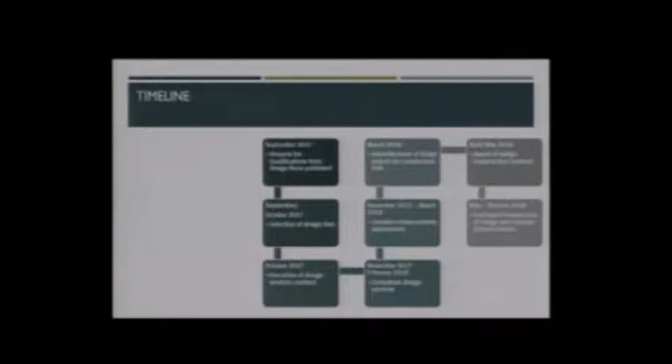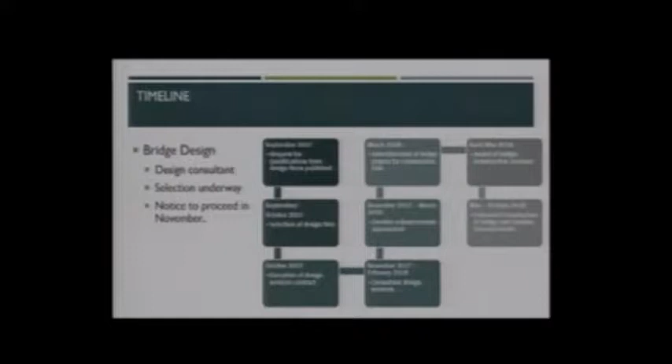First off, we'll talk about the bridge design itself. We are in the process right now of obtaining a design consultant. We put out a document called a request for qualifications back in early September. That's publicized, and qualified engineering firms who feel they can provide design services submit their statement of qualifications to the city. The city then chooses a consultant from that group, contracts with that firm, and gives them a notice to proceed to start the design of the bridge. We're anticipating that notice to proceed would be issued sometime in early November.

You can see here on the right, there's the request for qualifications, selection of the firm in October, the design contract in the latter part of October, and then getting folks started in early November. That would ultimately lead to a bridge design that we'd put out for bids around March of next year for construction of the bridge itself. We'd anticipate that construction would run from about April, when we'd award the contract, through essentially May through sometime late in the year, October or November of 2018, for completion of the bridge component.

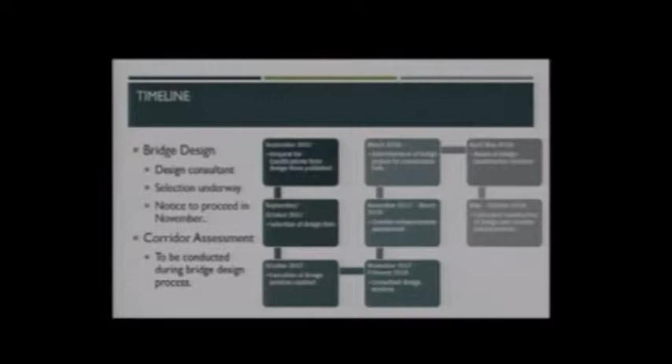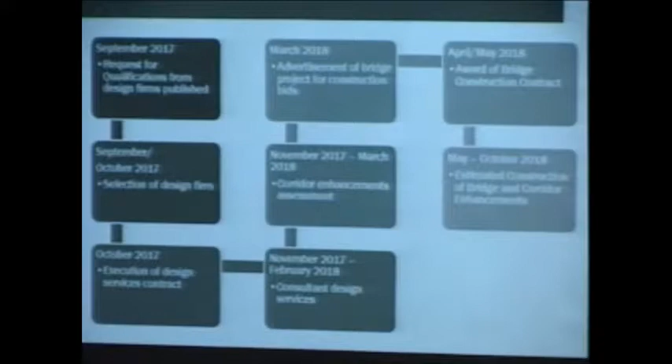Now, the parallel process going along with this is the corridor assessment. The idea is to take a look at the entire corridor from Washington Street all the way to Mountain View, and look at how we treat it - what is there, what may change, what perhaps should change with changes in traffic patterns as the bridge is installed. That's a process we'd be doing at the same time the bridge itself is being designed. You'll see in the schedule a corridor enhancements assessment happening November through March, through the winter, and then potential construction of those corridor improvements in that same time frame of May through October of 2018.

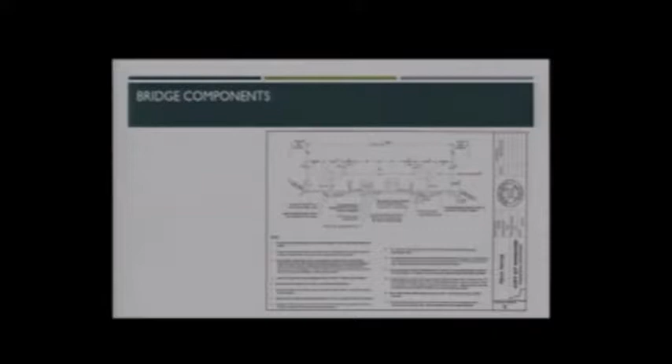So the bridge itself, in terms of what it will look like, is somewhat driven by the city's adopted standards. This drawing on the right is an adopted city standard for minor arterials, laying out what that street section should look like. This is where the numbers in the chart for minor arterials came from - the number of lanes, the bike lanes, and the size of the sidewalks. That's within this adopted city standard, which was adopted by the City Council back in 2014 by resolution.

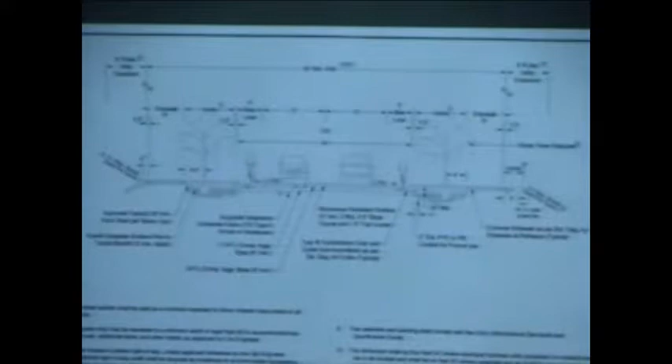In terms of how we'd apply it to the corridor, this is what we anticipate for the bridge section itself: still 2 vehicle lanes, which is what's out there today, 2 bike lanes passing through the area on the bridge, sidewalks on both sides, and most likely we'd match the existing street width. The standard here is 36 feet, but the existing road on either side of the creek is 44 feet. So instead of necking the curb down and back out, we'd probably just hold that 44 right through the bridge, matching the existing road section. That gives enough room for bike lanes, vehicle lanes, and a sufficiently sized sidewalk. That's what we're anticipating the bridge configuration to be, and we'll carry that concept into design.

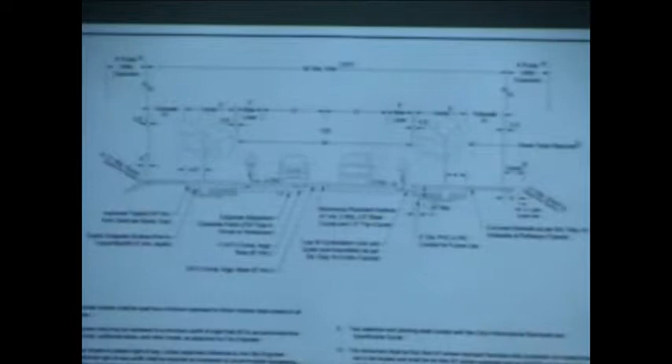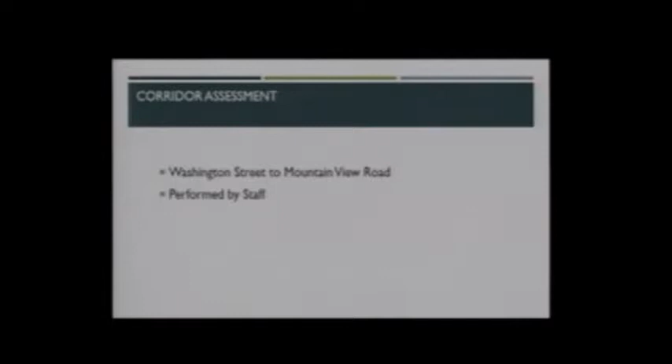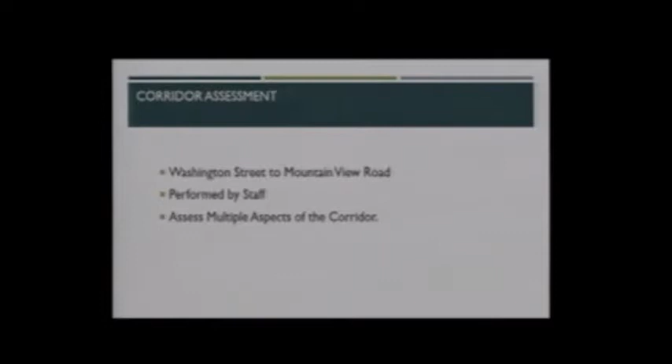Now, in terms of the corridor assessment, there are a lot more moving parts here, so we'll take a few minutes to talk about what those are. The idea, again, is to run all the way from Washington to Mountain View, looking at the entire corridor, not just the area around the bridge. It's something staff will be doing in-house, working with help from the Transportation Commission. We'll be looking at a variety of different aspects within the corridor and assessing what changes in traffic patterns might mean for those aspects.

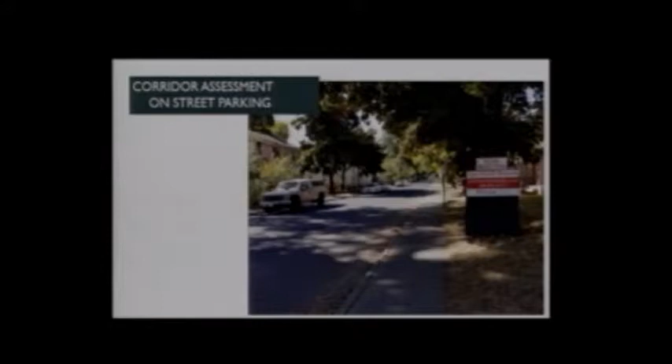On-street parking - obviously there's parking on one or both sides of the street pretty much throughout the corridor. It varies depending on where you are, changes sides of the street when it's only on one side, and in a lot of places it's on both sides. We don't necessarily anticipate any changes in the parking at this stage, but that's why we do an assessment - to see if there's any reason to make changes.

Bicycle facilities are a big one. These pictures represent some recent activities that we've installed—the beginning of some of the bike facilities along the corridor.

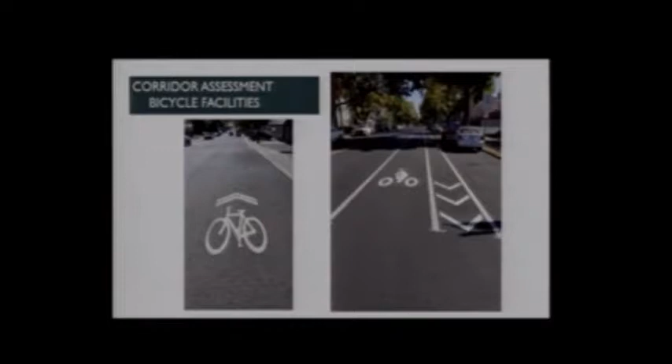This is actually the buffered bike lane, with a door zone buffer on the right side between the bike lane and the cars heading up the hill by the high school. That was installed here in the last month, part of the overall 2016 bike facilities and bike routes plan adopted by City Council, to start installing these kinds of facilities. So we'll be looking overall at the corridor and what other kinds of facilities might be installed beyond what we've already put in so far.

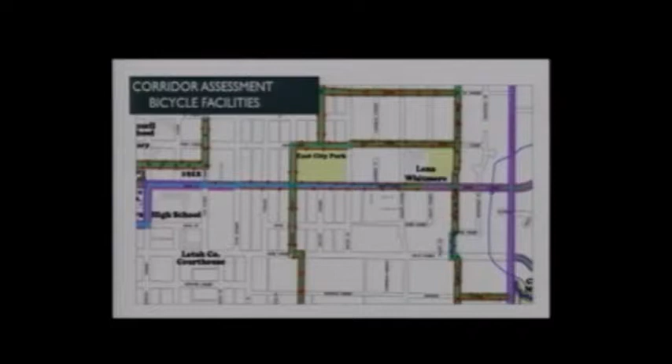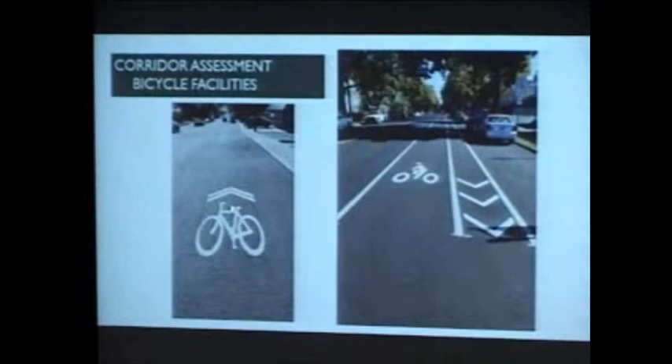This map is an excerpt from that 2016 plan, bike routes and facilities plan adopted by the council. Here's the high school, and this is 3rd Street in blue. The railroad-track pinky hatch represents bike lanes, and the lines with little red dots represent shared travel lanes, or shared vehicular lanes. So we would put down what we call sharrows—these guys right here—so that drivers know bikers are going to be sharing the lane with them.

So what we're looking at is: once you hit the top of the hill, Polk Street on through past, essentially almost to Blaine, we'd be doing shared roadway through there. The reason for that is it's only a 30-foot wide road, so there's not really room to put in dedicated bike lanes as we normally see them. Once the road widens out to 44 feet east of there, all the way to Mountain View and someday beyond, we envision bike lanes through that corridor.

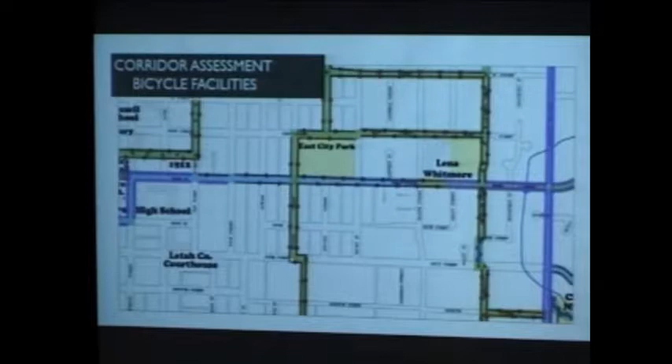So that's the bike lanes on the bike piece we talked about a minute ago—that's what's been envisioned as far as the plan. We'll be looking at bike facilities and how they fit into the overall scheme of the corridor as part of the assessment.

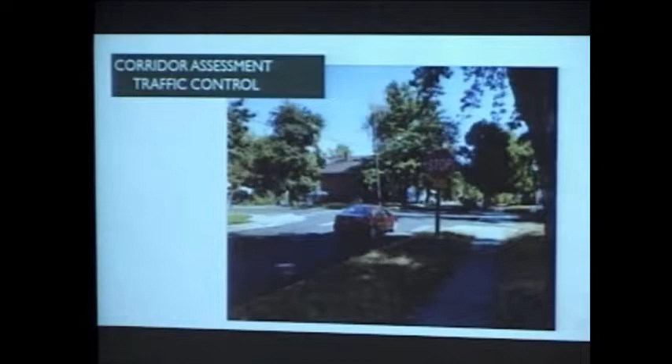Traffic control: right now, with the exception of Hayes and Blaine, every side street that approaches 3rd is stop-controlled, a two-way stop system—just north-south stops, with east-west free-flowing. At Hayes and Blaine, it's the opposite: east-west stops and north-south is free-flowing. We'll be looking at that to see if any changes are appropriate throughout the corridor in terms of how that stop control is currently in place.

School zones: we do have a school zone out there for Lena Whitmore, on 3rd Street as well as Blaine. This map shows the school zone—the red dot or star represents the location of Lena Whitmore Elementary School. 3rd Street is here, Blaine here, and 1st. Everything here in yellow is generally where the current school zone area is located.

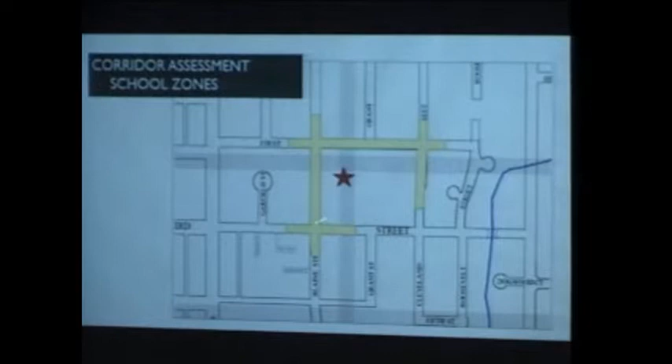I will tell you it grew in 2012. It used to be that 3rd Street was not within the school zone—it started just north of the intersection. We did a review of all our school zones back in 2012 and felt that this particular one should be expanded just because of the proximity to the school. So it grew to include a portion of 3rd Street as well, as you see on the map. Again, something we'll look at—at this point I don't anticipate any changes, but it's something we want to consider as part of the overall picture.

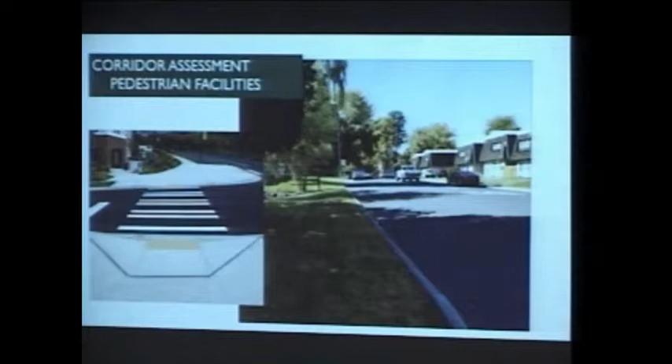Pedestrian facilities: as I mentioned earlier, transportation looked at this once upon a time. One of the things we identified back in 2005 and 2007 was that there were about 7 parcels along the corridor that do not currently have sidewalk. So we'd look at whether it makes sense to include sidewalks within the corridor as part of the overall improvements, to make sure we've got a fully functional pedestrian route—looking at areas without sidewalks, and also whether we have compliant ADA ramps at all locations along the route.

Public art is a component. All public works facilities and projects within the City of Moscow that are above ground have to essentially put 1% of the project cost towards public art. We don't know yet what public art in this project might look like if it's included, or whether there's the alternative to make a payment to the Public Arts Fund in lieu of including it in the project. That's something we'll have to take a look at.

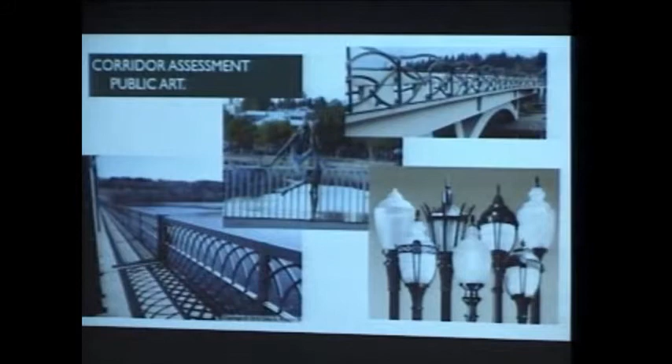I just grabbed a few examples of public art type things that perhaps could be done, from other facilities out there across the country, just to give some ideas. We also consider historic lighting or some kind of special lighting as part of a public art option. So we don't know yet how that will look, but it's something we'll want to talk about in the process of looking at the corridor itself.

The last big piece in the overall assessment is traffic calming. As I mentioned earlier, the transportation plan recommended that the bridge go in, but that traffic calming be included within the corridor. Traffic calming and mobility and accessibility are things the city has worked on off and on for years. This particular effort had to do with the Mobility Task Force, a subset of the Transportation Commission looking at overall accessibility within the community.

Traffic calming is something with a lot of different perspectives on what it is. One of the more common definitions is that traffic calming uses physical design and other measures to improve safety for motorists, pedestrians, and cyclists. It aims to encourage safer, more responsible driving and potentially reduce traffic flow.

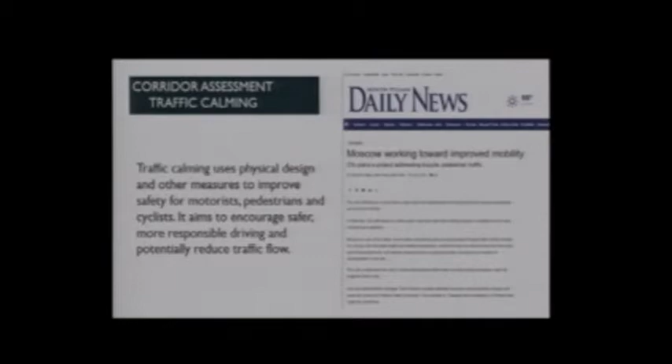The big deal with traffic calming is managing speed, because speed is the issue. When you look at conflicts between bicycles and cars or pedestrians and cars, it's what's called a speed differential—is the car going that much faster than the other mode so that if they interact, there's a real problem? Traffic calming is intended to bring vehicle speed down so that speed differential is as little as possible. It isn't necessarily meant to divert traffic or discourage people from using roadways, but to address the speed at which people traverse a corridor. The idea is to improve safety by managing the speed of vehicles.

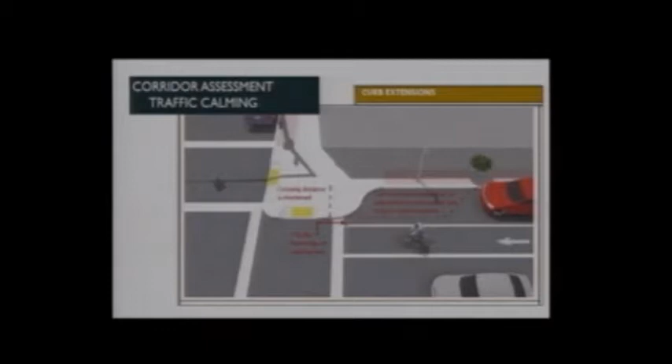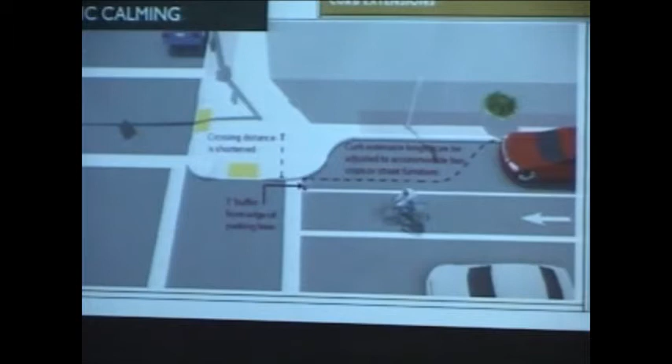There are different ways to do traffic calming. I've thrown a couple of quick examples up here that we'll look at as possibilities. This is a technique we've already used in the city, called curb extensions or curb bulbs, where the curb line jogs toward the center line at intersections, usually about the width of a parking lane. This narrows the roadway at the intersection, and anytime you narrow things, people feel constrained and tend to slow down—you manage the speed.

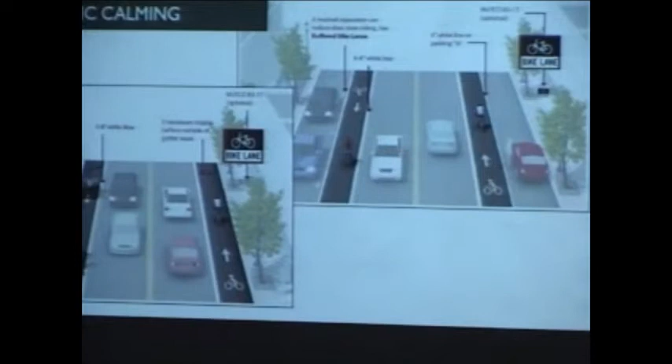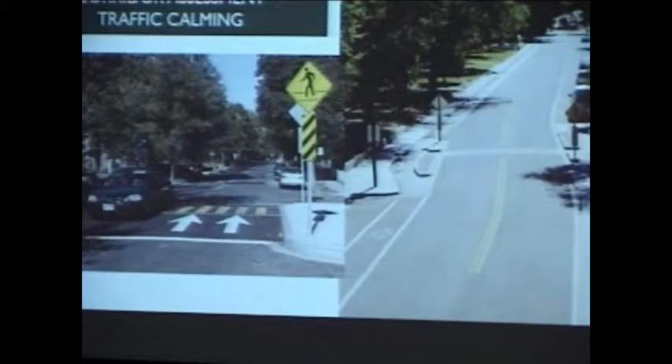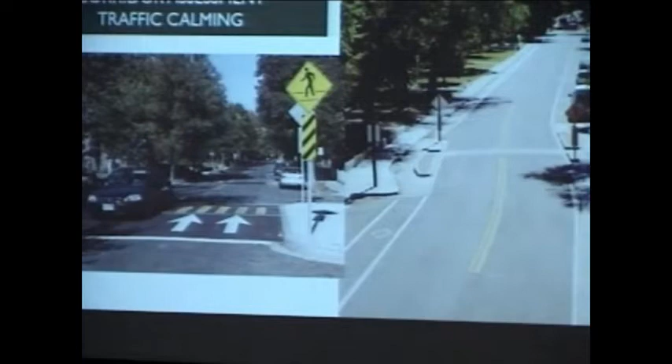Other options exist too. This is called a speed hump—I don't know if it's something we would do, but it's something we'll look at as part of the overall picture. It's a very gentle elevation of the roadway, in this case where the pedestrian crossing is, causing people to slow down a bit so they don't hit it too quickly. Another interesting idea alternates parking on sides of the street, which moves the center line over a bit—a chicane option—creating a gentle movement that again causes people to slow down, managing speed.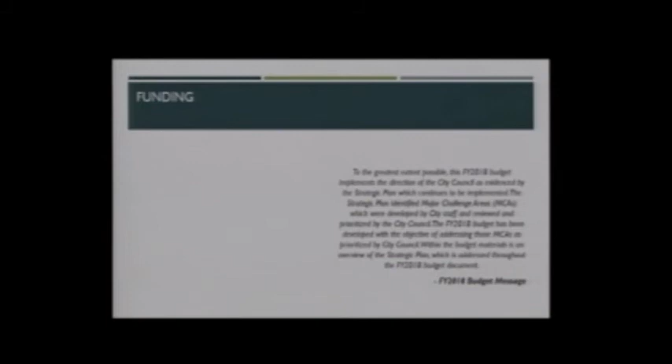Funding has been a question, and one thing the city has worked on over a number of years is developing a strategic plan, which we did a couple of years ago, and then implementing that plan annually. The city created a strategic plan and identified major challenge areas to address in the near term, one of which had to do with mobility of all modes of transportation through the community. In the 2018 budget, the inclusion of the 3rd Street Bridge actually complies with the council's desire within the strategic plan to address east-west mobility within the community.

For the bridge, what is currently in the 2018 budget adopted by the City Council is, in the Capital Projects Fund, $580,000 for construction of the bridge structure itself—that's a specific line item within the budget for that purpose.

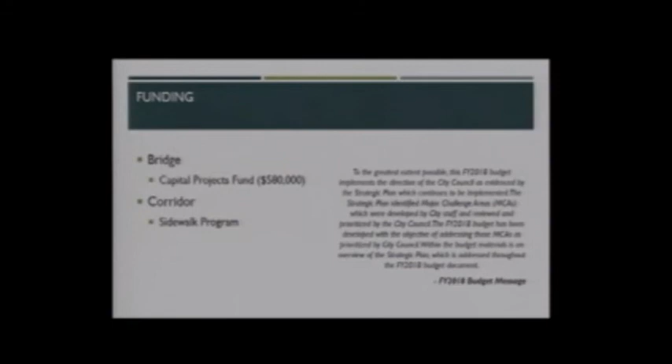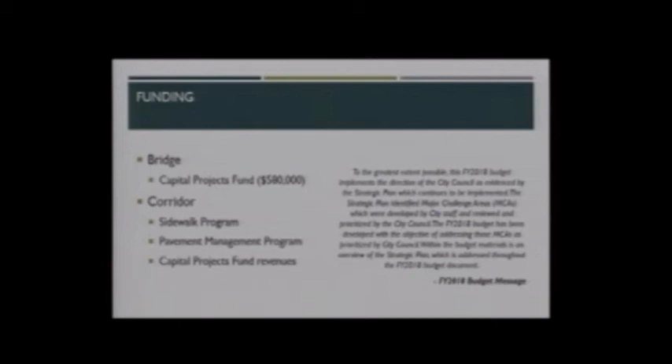As it relates to the corridor, we don't currently have a specific line item, but staff has identified funding sources potentially available for whatever projects come out of the assessment, and these could vary, so the programs vary. One would be the sidewalk program, for possibly filling gaps within the corridor. Another would be the pavement management program, which could use funding toward improvements to the road system itself. There's also potential for other Capital Projects Fund revenues to be used toward corridor traffic calming measures, if that's ultimately what the City Council determines we want to build.